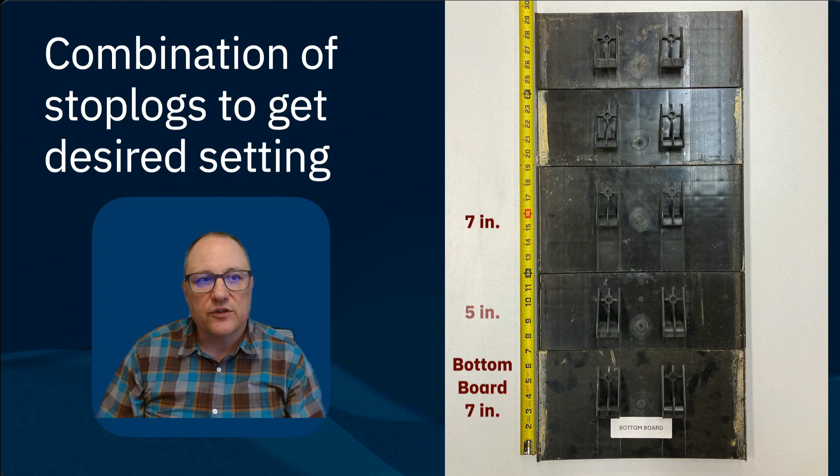When we talk about stoplog settings, we're talking about the combination of stoplogs needed to get the desired settings to match the design specs for the practice. So in this example, there is a bottom board that is 7 inches, another 7-inch stoplog, then 3 5-inch stoplogs, for a total of 29 inches.

To find the stoplog settings for your individual practice, most saturated buffers and bioreactors will come with an operations and maintenance plan, typically using an NRCS format. If there isn't an NRCS O&M plan that came with your design, there should be some other document with the stoplog settings.

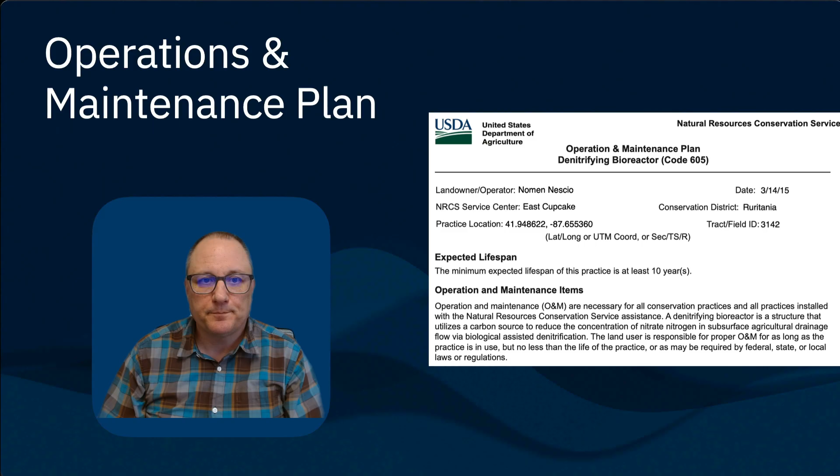There are generally 3 different ways that the stoplog settings will be reported. The first is the measurement from the top rim of the control structure to the top of the highest stoplog. This is most convenient for field checking that the stoplog settings are correct because it can be quickly done just using a tape measure. A second method is the height of the stoplogs above the bottom of the control structure.

And then the third method is just to give the number of 5-inch and 7-inch stoplogs needed to get the stoplog setting. This is most convenient when you're actually putting stoplogs in from scratch, since the other 2 methods require a little math to figure out what the actual combination should be.

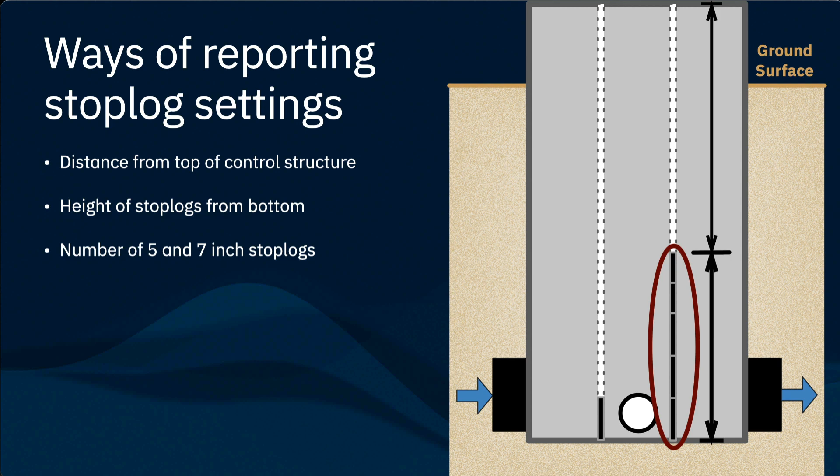In the 3 chamber control structures typically used for saturated buffer and bioreactor inlets, the stoplogs that divert flow into the saturated buffer or bioreactor are the downstream stoplogs, which go in the stoplog tracks farthest from the field, or closest to the outlet. The upstream tracks closest to the field, also called the field side control, are only used where drainage water management is used in addition to the saturated buffer or bioreactor.

So this won't apply to most saturated buffers or bioreactors unless you specifically requested a drainage water management plan as well. However, it is a good idea to leave a bottom board in these upstream tracks.

Another important piece of information in your operations and maintenance plan is whether your site uses year-round stoplog settings or if it needs seasonal management. The most preferred sites for saturated buffers and bioreactors are ones where the ground elevation at the control structure is a few feet lower than the lowest elevation in the field. In that case, raising the stoplogs in the control structure to divert water into the buffer or bioreactor won't negatively impact drainage in the field.

So, for year-round management sites, the stoplog settings can generally be considered as set it and forget it, because the stoplog settings will rarely, if ever, need to be changed.

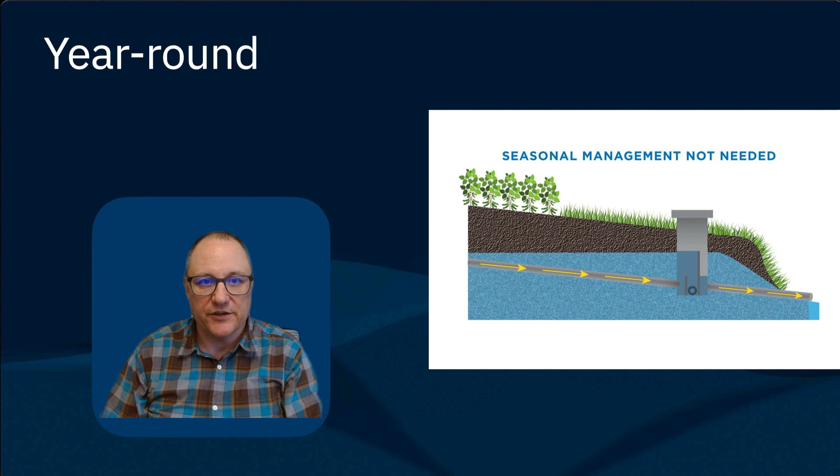For flatter sites, raising the stoplogs will have an impact on drainage in the field, so the stoplog settings will need to be changed at key times during the year to make sure the field is suitable for planting and harvest, and to prevent damage to the crop.

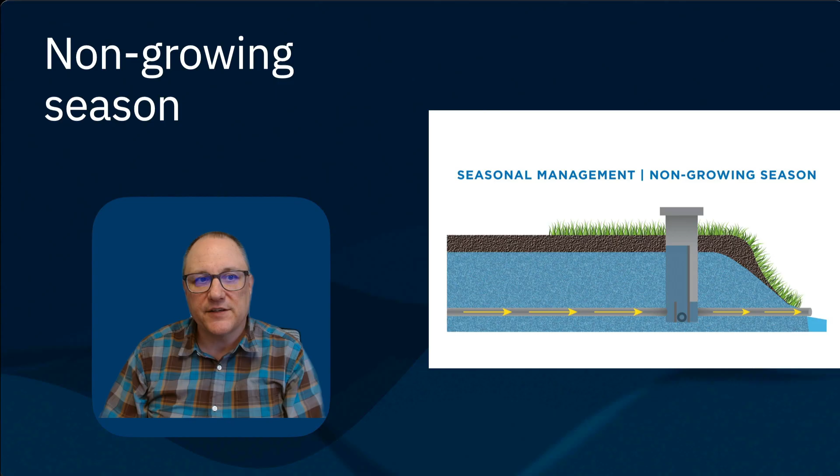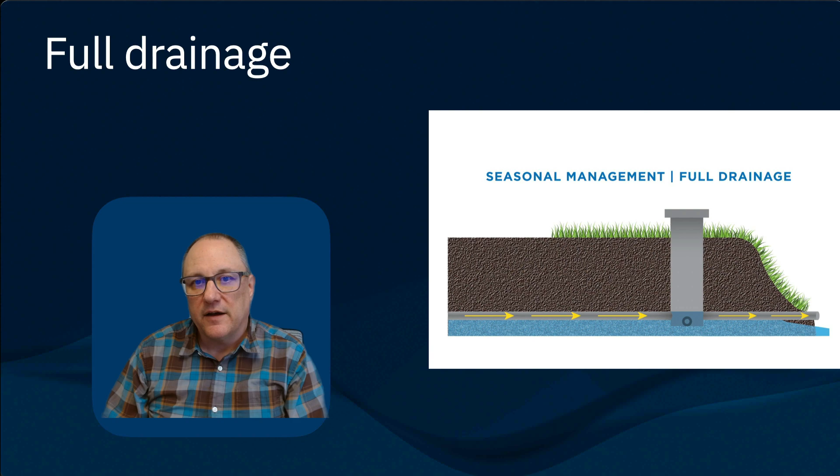So starting right after harvest, with seasonal management, the stoplogs will be raised to their highest setting since drainage isn't needed over the non-growing season. Then approximately 2 weeks before planting, stoplogs will need to be removed to drain the field to prepare for planting. This will typically mean removing all of the stoplogs.

Then approximately another 2 weeks after planting, the stoplogs will be raised again, but typically not as high as in the non-growing season settings. This growing season setting is designed to balance getting some treatment from the saturated buffer or bioreactor while minimizing the risk of crop damage.

However, since it's not in full drainage, conditions should be monitored during the growing season, because some stoplogs may need to be temporarily removed following big storm events or during other particularly wet periods during the growing season.

Then, approximately 2 weeks before harvest, if it's a wet fall and there's water in the control structure, the stoplogs can be removed to put the system back in full drainage to drain the field for harvest. But if it's a dry fall, the system can just stay at the growing season settings. And then once harvest is complete, the stoplogs should be raised back to the non-growing season setting.

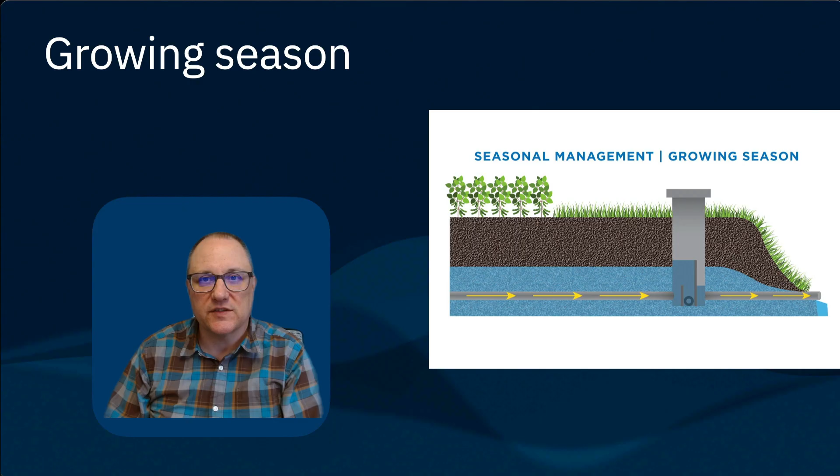So let's take a look at some examples of finding the stop log settings.

First, for a saturated buffer with year-round settings. Your exact plan may look a little different depending on what state you're in, but it should have a section similar to this with those stop log settings. This one indicates that the stop log settings are maintained year-round, and there's a blank for use if drainage water management is being used to manage drainage from the field. However, as discussed previously, this will not apply to most saturated buffers unless you specifically requested a drainage water management plan along with your saturated buffer.

The next blank is where the stop log setting is shown for diverting water into the saturated buffer distribution pipe. For this example, the stop log setting is given as 24 inches as measured from the top rim of the control structure.

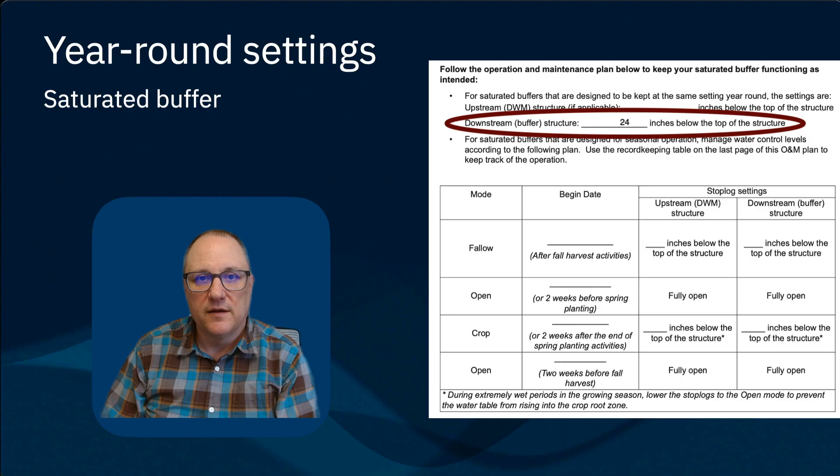For saturated buffers that do require seasonal management, a table similar to the one here will be used to show those stop log settings. As in this example, the approximate dates that the stop log settings should be changed are shown. The actual dates will vary depending on typical planting and harvest dates for your area, and they can be adjusted depending on the timing within any given year.

Then the corresponding stop log settings are shown. In this example, 24 inches below the top of the control structure during the non-growing or fallow season, and 36 inches during the growing or crop season, and then fully open around planting and again as needed prior to harvest.

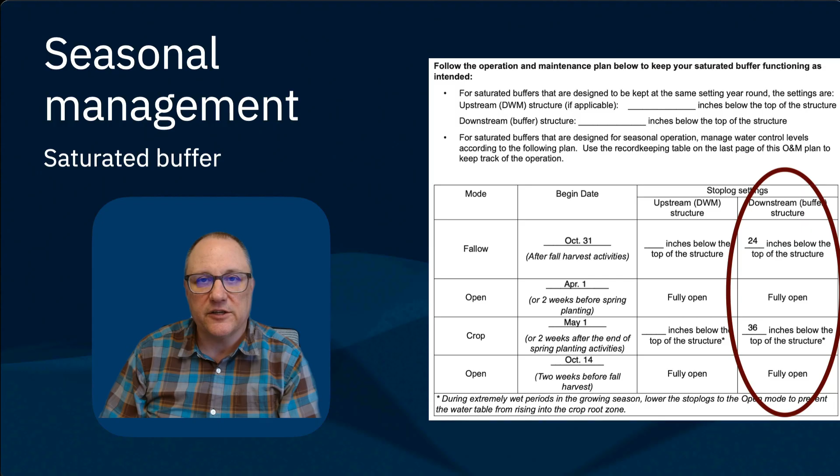For bioreactors, the stop log settings will look very similar, except that there will be a setting for both the inlet and the outlet. Usually these will be separate control structures, but sometimes a combined 4-chamber control structure is used to control both the inlet and the outlet.

For this example with year-round stop log settings, the stop log settings are shown with all three methods: distance from the top of the structure, height above the bottom of the structure, and the number of 5 and 7-inch stop logs, for both the inlet or upstream structure and the outlet or downstream structure.

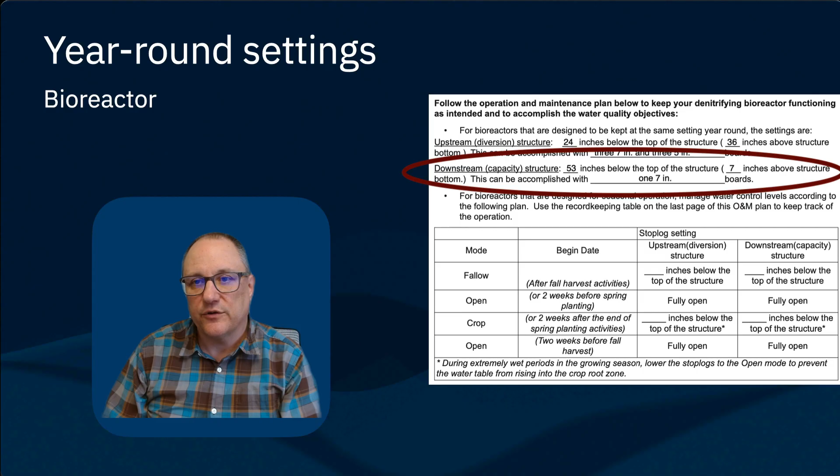Similar to the earlier saturated buffer example, the stop log settings for this bioreactor are given in a table, with the timing for making the stop log changes and the associated stop log settings for both the bioreactor inlet and the outlet.

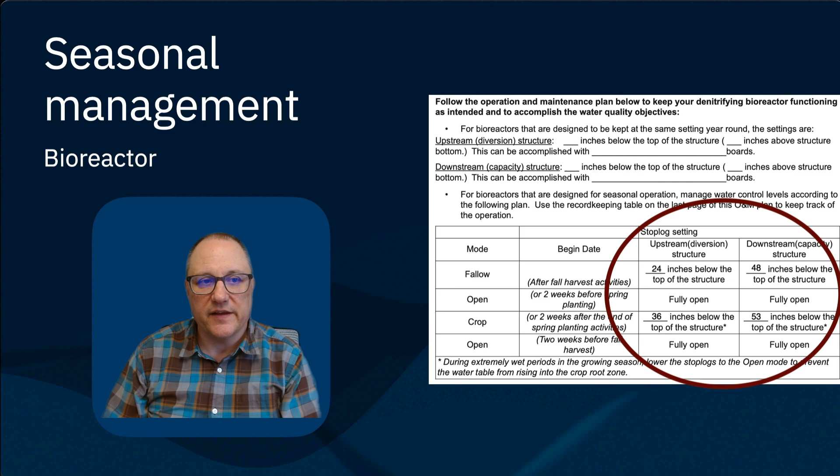As discussed previously, depending on whether you're just double-checking your stop log settings or adding or removing stop logs, one method of thinking about the stop log settings may be easier to use than another. Fortunately, there are some conversion tables that, with one stop log setting value, allow you to find the other values based on the height of your control structure.

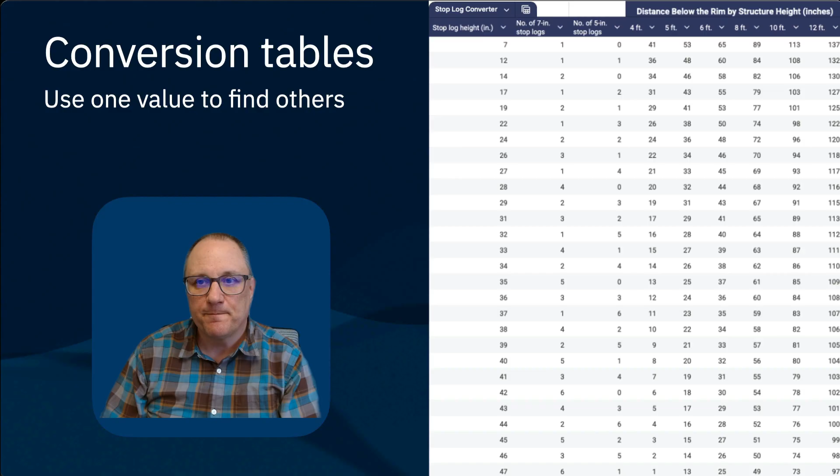So using the control structure height and the distance below the stop log setting, you can find the stop log height from the bottom and the corresponding number of 7-inch and 5-inch stop logs that are needed.

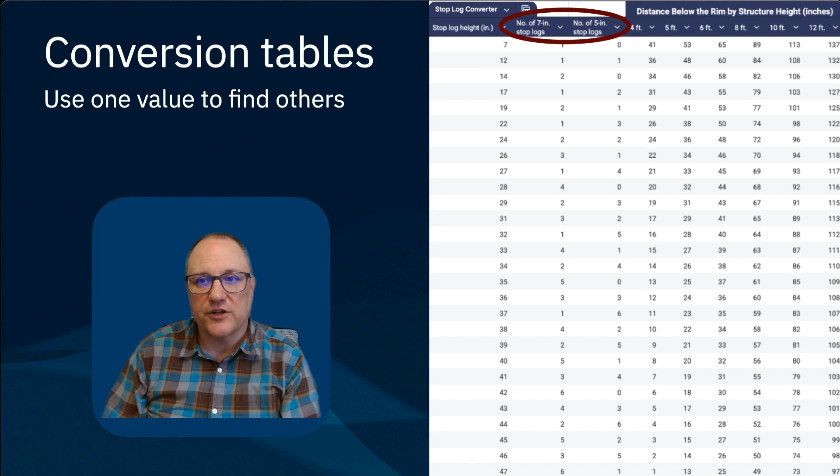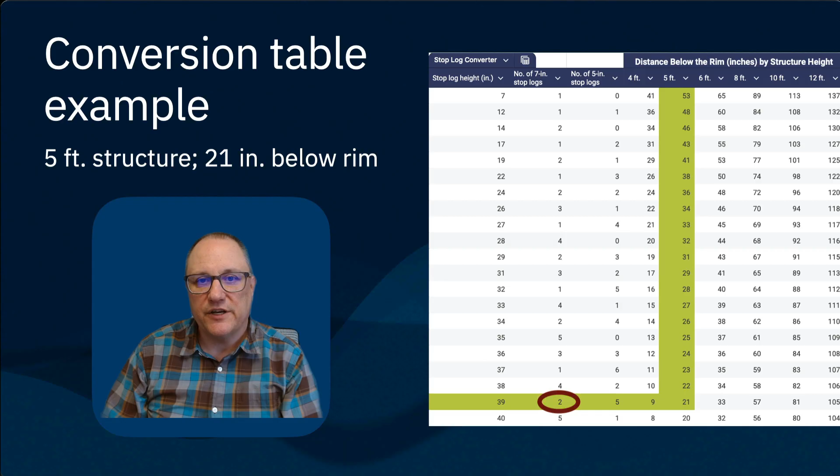Taking a look at an example for a 5-foot tall control structure and a stop log setting of 21 inches below the top, using this table, you would go to the column for the 5-foot control structure and read down until you find 21 inches below the top. Then you would read across horizontally to find the stop log height is 39 inches, and that this can be done with 2 7-inch stop logs and 5 5-inch stop logs.

Another tool that can be helpful with understanding stop log settings is the Stoplog Settings tool from the Iowa Soybean Association. With this tool and using the slider to change the stop log height, the tool will tell you the corresponding number of 7-inch and 5-inch stop logs and show that combination graphically as well.

This tool can be found on the ISA website under Research and Results, and then selecting the Drainage Calculators category.

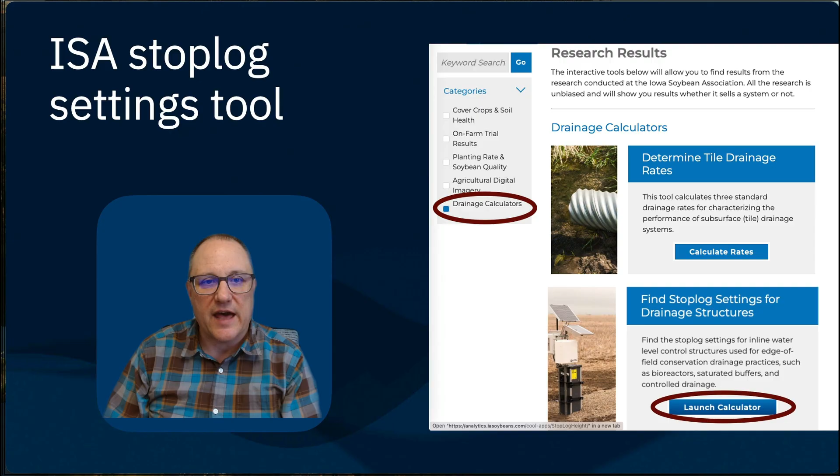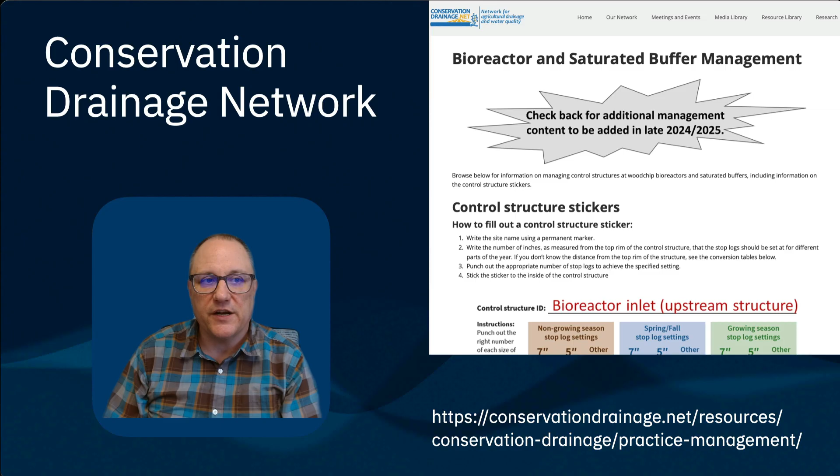Another resource for information on saturated buffers and bioreactor management, including stop log settings, is the Practice Management page at the Conservation Drainage Network website. This includes links to the ISA stop log tool and those stop log conversion tables. You can also find this information from the Soil and Water Conservation Society's website and their conservation media library by scrolling down to find the section on managing water control structures.

So thanks for watching. Hopefully this video is giving you a better understanding of how to find and work with your stop log settings for your saturated buffer or bioreactor.